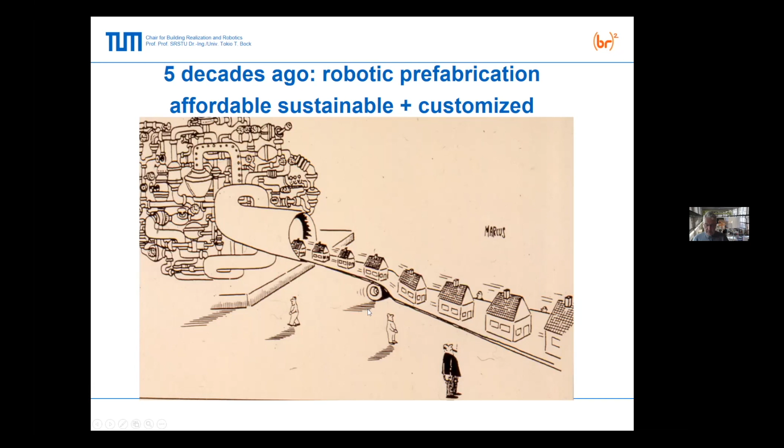That's already state of the art, and we are quite advanced, having factories that can produce 50,000 houses a year. It's not mass production anymore, it's customized production, but everything is automated. This is one of the most automated factories in Japan and maybe worldwide. They produce about 50,000 houses a year in steel.

I think it's quite interesting for what Mr. Woods will show, because they also want to do something in steel. And the assembly, I was also involved in the 80s - rapid on-site assembly in 4 hours. We assembled a house of 150 square meters, 2 stories, and kitchen, everything already equipped.

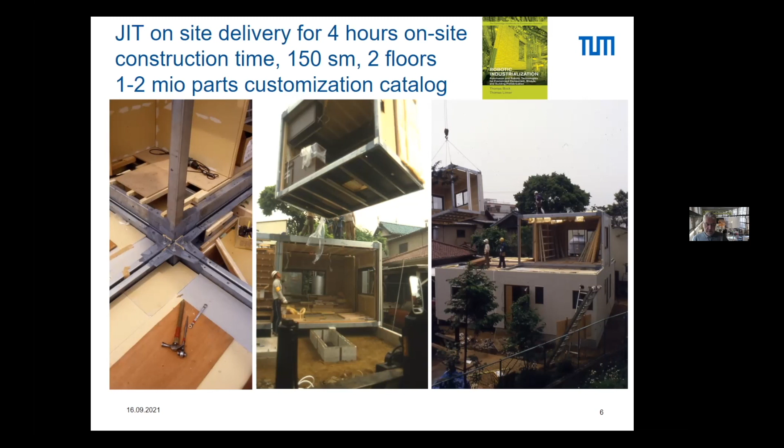So high prefabrication ratio. Then the next step was to close the loop to the construction site, since most of the things go wrong on site, as you can see at the Berlin airport and other disastrous sites. It doesn't help if you do the nice prefabrication module and then you screw it up on site.

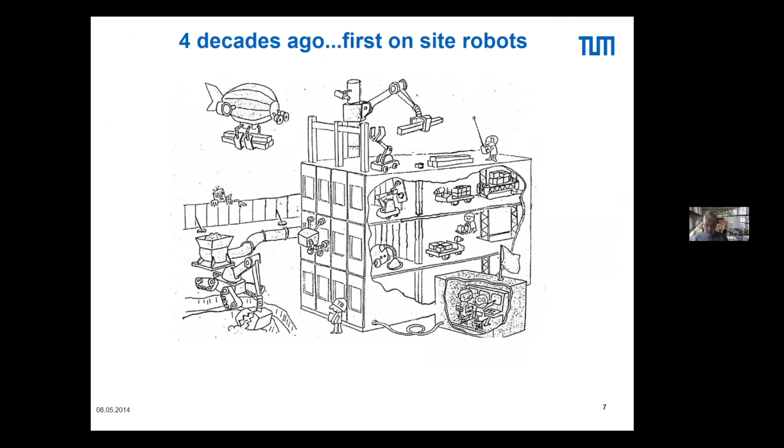These were the first 50 construction robots developed. I was part of them during my doctorate at the University of Tokyo. Now we've gathered about 300 robots in the Cambridge University Press series, 5 volumes. I'm going to show more details next week as well here.

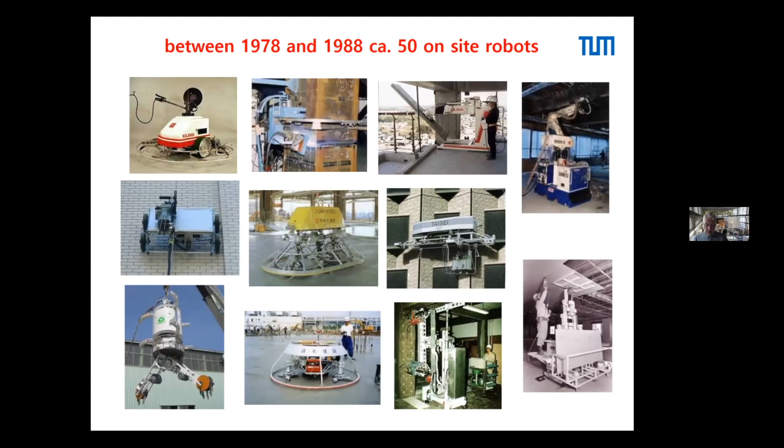And recently we did a lot of the refurbishment and renovation robots because that's a big challenge. And now robotics becomes more flexible and more adjustable.

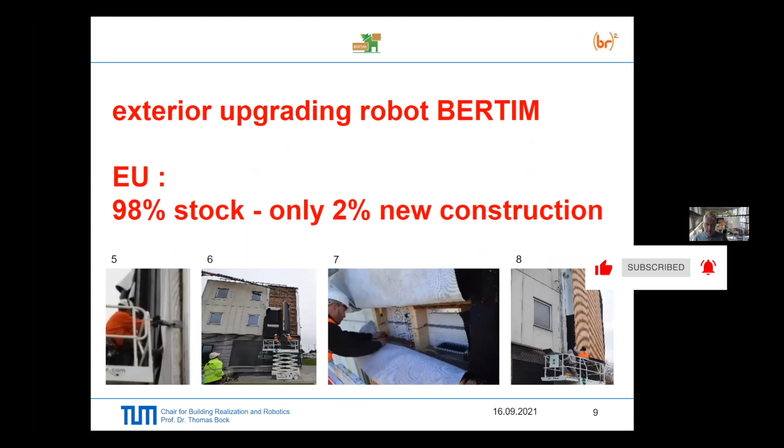Also, I will show next week a little bit more on it.

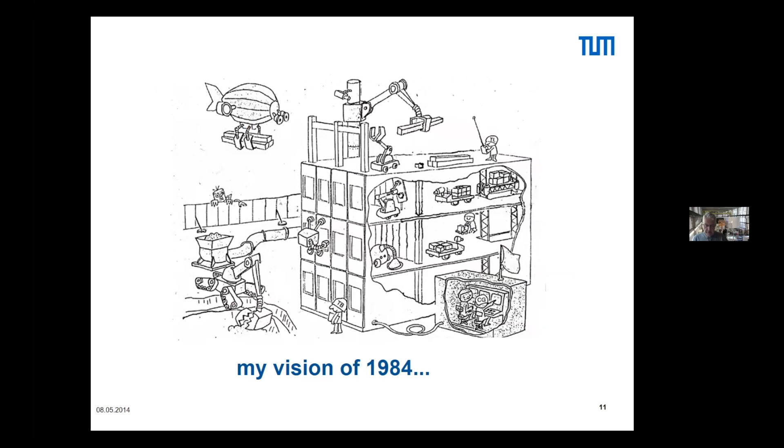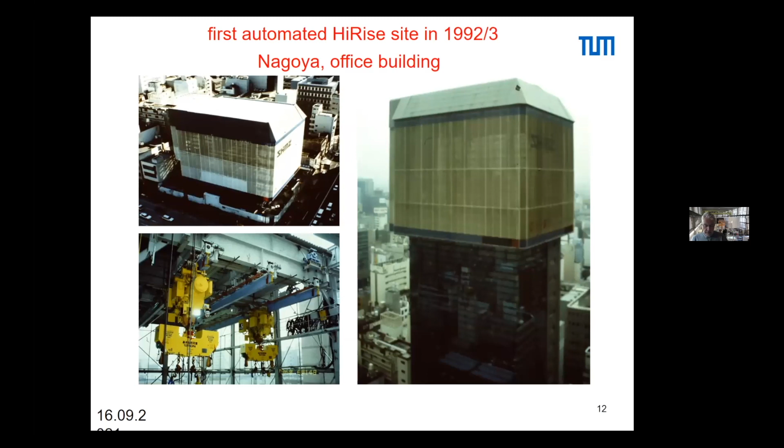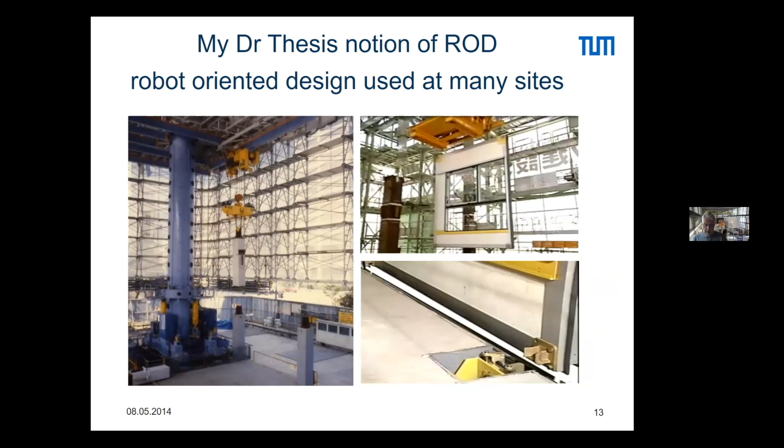I was also involved in this first automated construction site. It's like a vertical shipyard. We developed all the machinery, and I did the robot-oriented design, joining the high-rise faster than conventionally possible. This was applied to many construction sites by different companies.

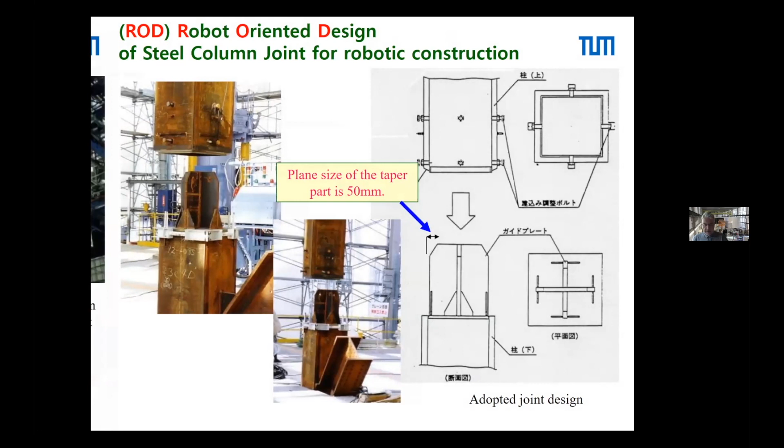This is part of my work for the company, so the robot could assemble the columns. We just talked about MEP with Alan - MEPs are already prefabricated and shipped all around Europe from Ireland. We did the same thing, assembling all the installations by robots on site. This was one of the recent sites I was involved in, in Osaka and Yokohama. But then came the virus, you know.

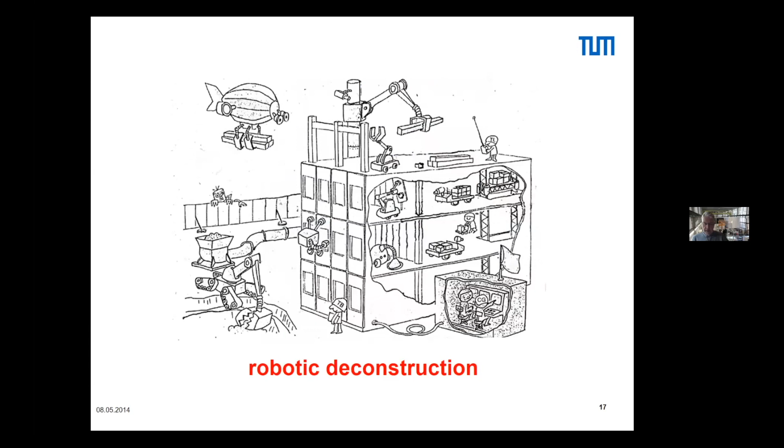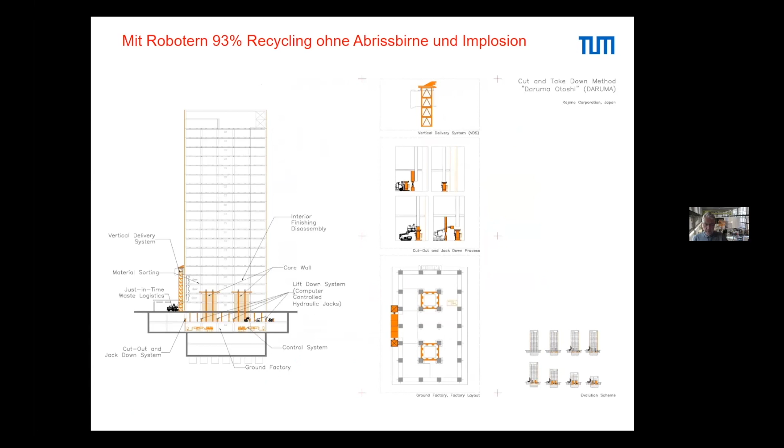The next thing is deconstruction. It's not dusty, there's no implosion, no wrecking ball. We did it systematically - we went into reverse of the robotic construction. We did the robotic deconstruction of this high rise, and many other high rises. You could recycle 93% of the whole high rise.

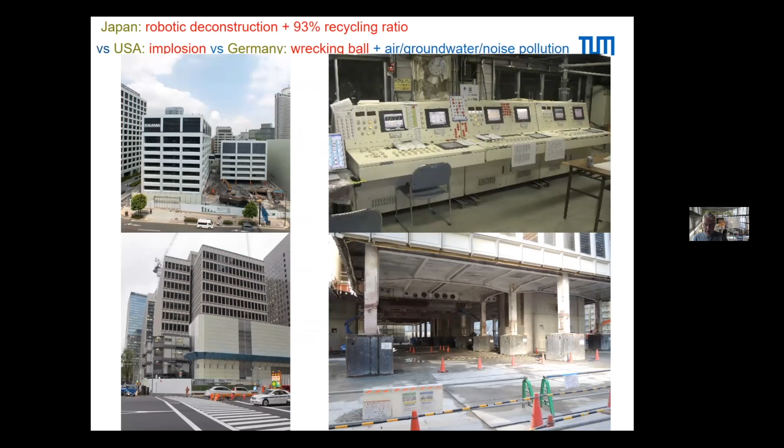Here are some examples. The lower one is across from the Imperial Palace in Tokyo, so they didn't want to disturb the royal family - very quiet, very clean deconstruction site. There's another one in Tokyo where it's very crowded - you can never use a wrecking ball, and you can never dream of using implosion. This would be forbidden in Tokyo.

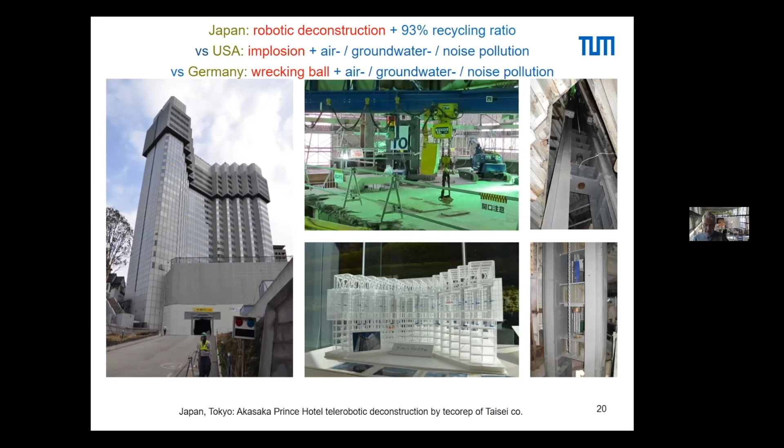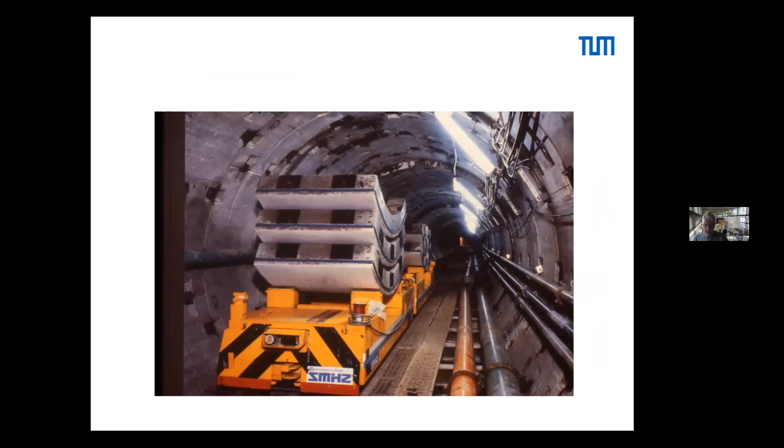Civil engineering infrastructure is also a big thing. I was involved in some new robots for huge underground storage construction, for huge underground caverns, automated tunneling under Tokyo Bay, robotic assembly of tunnel segments, and controlling several robots at the same time.

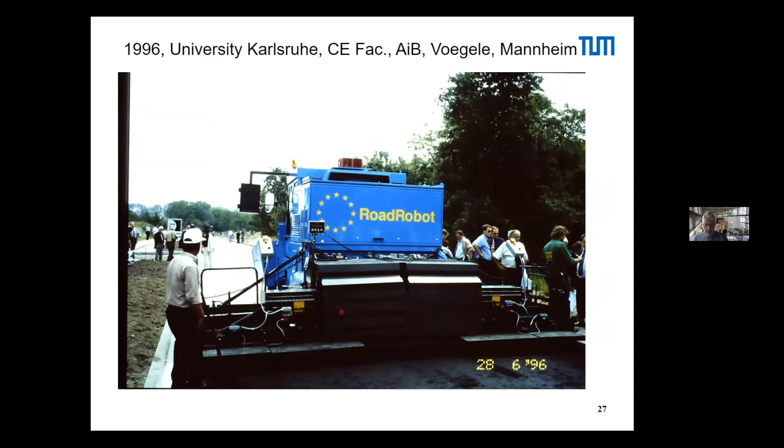I was 8 years with the civil engineers at the University of Karlsruhe. We developed the first European road robot, as you can see here. Now I'm in Munich with the architects, but actually you have to combine all of this.

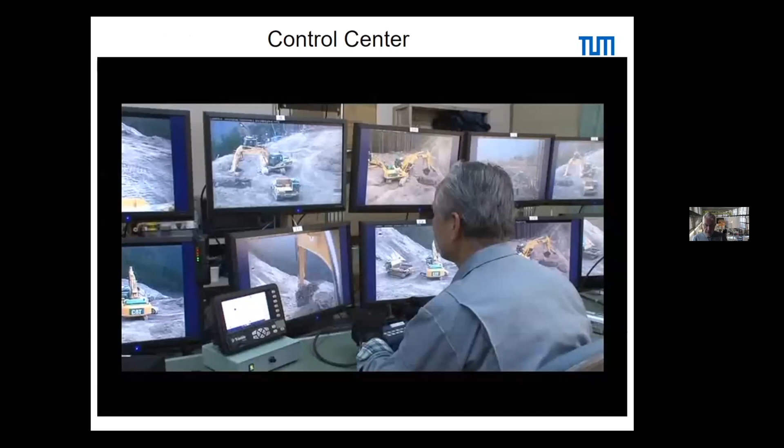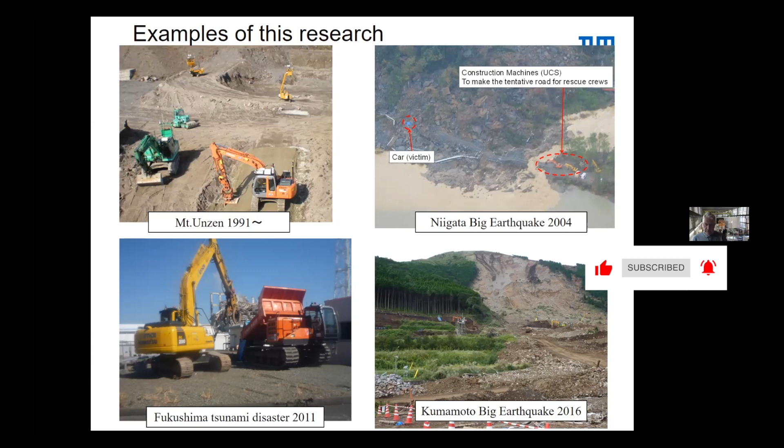Here's one of the most advanced autonomous robotic fleets, used after volcano eruptions, tsunamis, or landslides in Japan - different disasters. I was involved in these as well. So whenever it's dangerous, they send in the autonomous construction machinery next to the volcano or landslide. Well, that's maybe the vision of the future.

Okay, yeah, we're just under. Do you have many more slides, Thomas, just there?

No, that's over - maybe the next step is space construction. Anybody who wants to get into more detail can check the Cambridge University Press books - there are about 300 systems described. Anyhow, more next week.

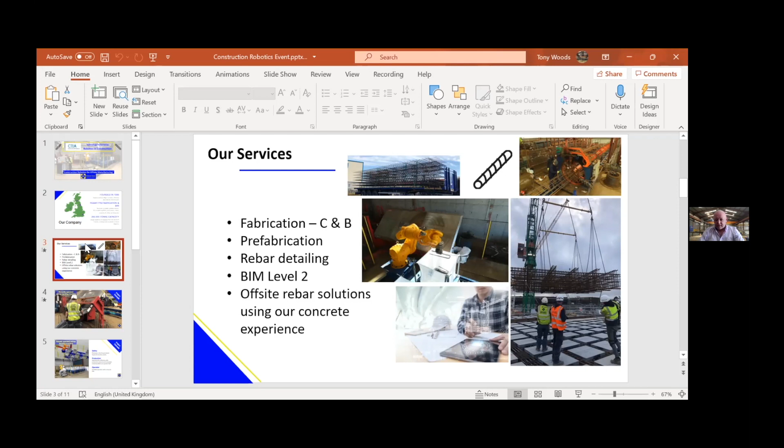So we have a situation here, which is our case study. What you see is a manual machine, a very manual operative process, and there were some hazards with the machine. There's a guard over the current head of the machine, as you can see there, to protect the operator. But we believed there was a better way and a better process.

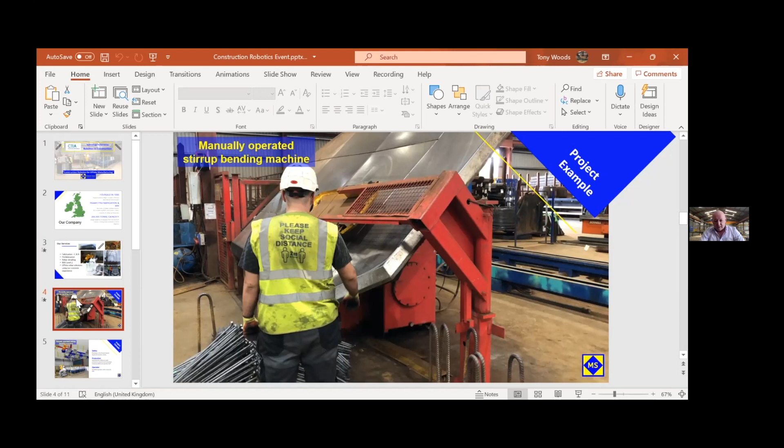So at attendance of a trade show back in 2017, we looked at safety with a particular supplier. We looked at production optimization, and we looked at the operator. And we looked at a robotic process. How can we bring a robotic process to our business? And how will it benefit us and the future of our productivity and make it a safer working environment?

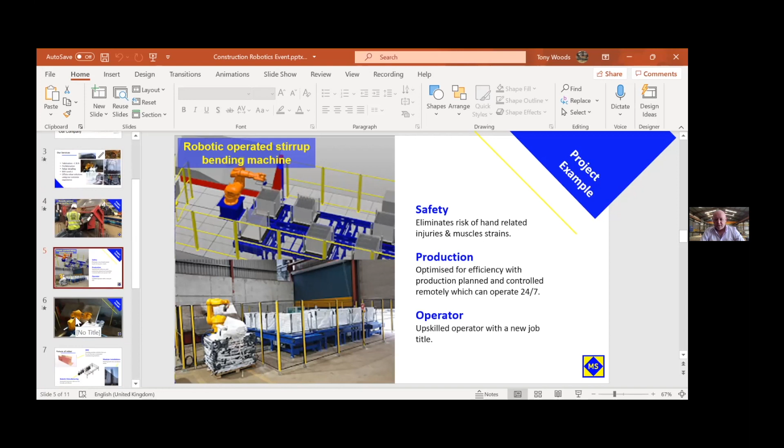The other consideration we had for this process was primarily the application of trying to bring new talent to our industry. Our industry is traditionally known as a very manual operative process, not the cleanest environment, as you're handling steel all the time. So by combining our expertise in what we do and the robotics engineering company whom we use to supply our first robot, we came up with this.

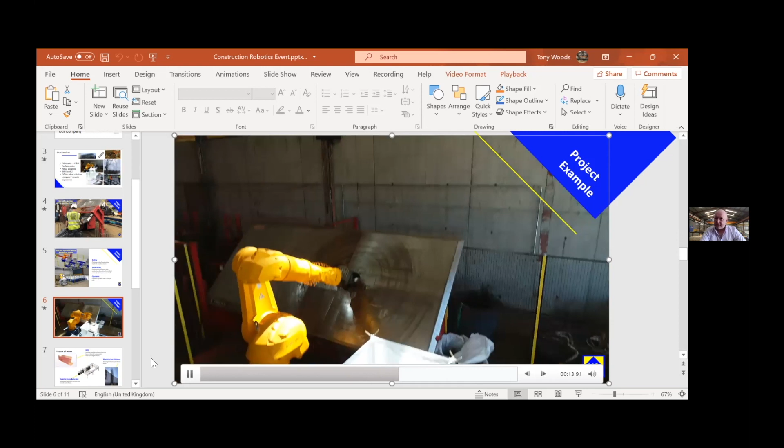And what you see here is now the robot assisting the machine. The machine is operating on an automatic cycle. The robot is doing all the manual handling and all the manual work that was previously done by an operator. And that now

is a benefit from our point of view in two ways. Firstly, from a health and safety point of view, it's enormously beneficial. Secondly, the precise accuracy of the way the material is being stacked in the sack material that you can see placing in it is far different to what a manual operator will do. So it's way easier when it gets to site to take the material back out again of the sacks. And we've had our customers complimenting us on that particular item.

So when we got this robot, we started to acknowledge and decide, well, what can we do next? Part of our process and configuration of reinforcement is in an offsite environment. Our next step is to take it to the BIM process, which we detail the modular sections. The modular sections are an enormous benefit on site, but before bringing them to site, we have got to come up with a robotic manufacturing process.

And what you're seeing here is a simulation of our idea. We haven't got there yet. We're very, very much in the infancy part of this process, but we are developing a machine to automatically weld reinforcement material with robots.

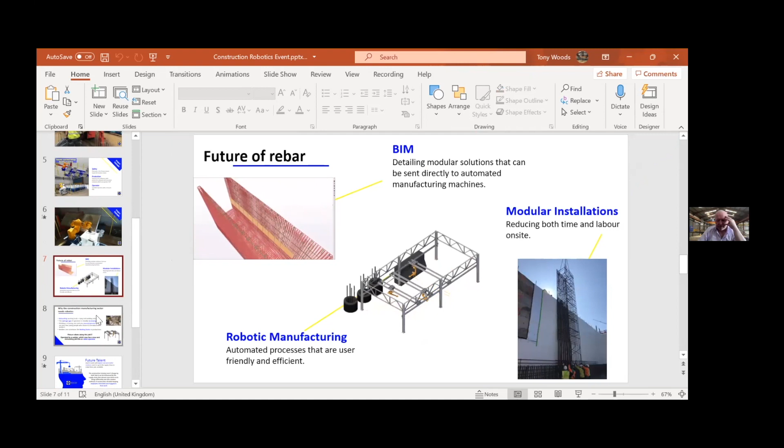What we're achieving from that, and why we believe the manufacturing sector needs robotics, is firstly, we're currently traditionally doing a lot of exhausting work tasks, tying and welding of rebar. The average age of the operators is steadily increasing, and it's now around 44 for a manual operative in our industry. Welding is a very boring, hot and manual process. There are very few young people who are choosing this as

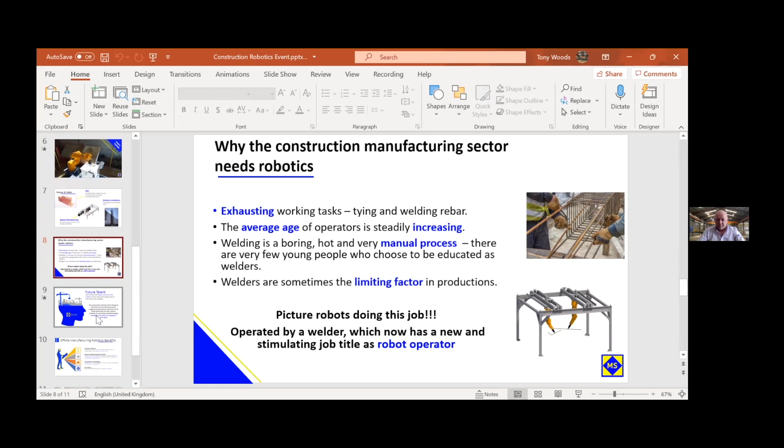their future careers. And what we are trying to do, I suppose, is initiate the robotic process and now employ robotic technicians. And that will be, I believe, the future generation of people that will become part of industry compared to the generation of people who are now currently working a very manual operative process.

The industry is not going to change. Future talent want to work with digital and automated solutions, and it's up to us as a supply chain to make these jobs available. The industry, as I said, will not change itself, but it can be influenced by the supply chain that attracts new talent to do things differently and more modern methods of construction, all the while keeping people engaged and bringing new talent to the business.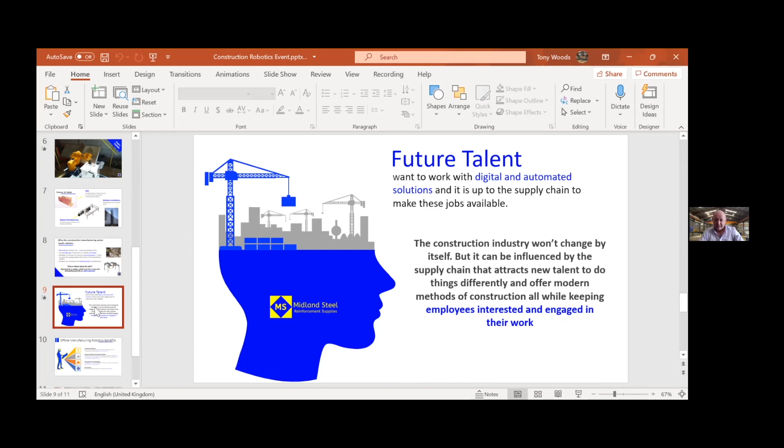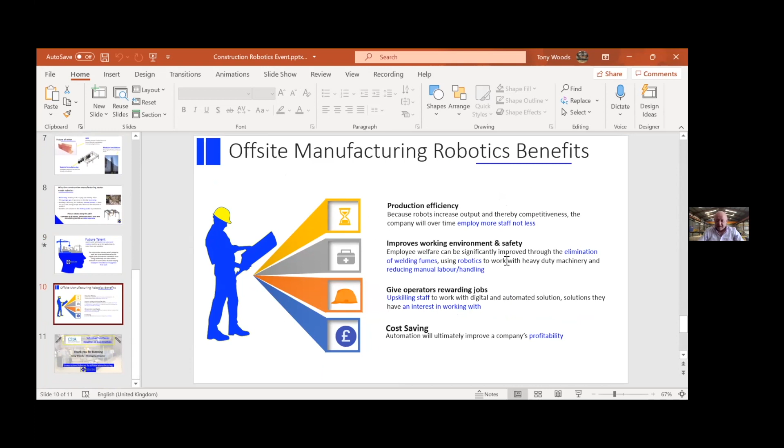What that will achieve: offsite manufacturing using robotics with production efficiency, improves the work environment in health and safety, which is our number one priority. It gives the operators rewarding jobs, and we can upskill our current operators to become those robotic technicians and employ more on the mechanical and electrical side in terms of maintenance. And obviously at the end, that will bring, with automation, a good cost saving to our business and a good commercial offering then to our customers.

So that's where we are as a business. We started with one. We're now looking at adding and developing the machine for phase two. And we believe in 10 years' time that without robotics, our industry will certainly be in an enormously bad way unless we can automate and digitalize our full process. The digitalization is as important as the robotics, as they're all linked. And that's where we see ourselves going as a company.

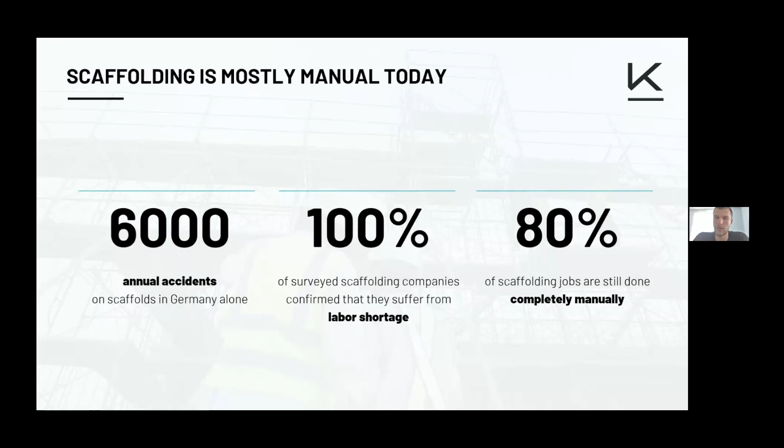As Professor Bock correctly mentioned, our first focus is scaffolding assembly. Scaffolding is one of those areas which struggles today from problems of safety, labor shortage, and inefficiency. A lot of scaffolding projects are still done completely manually, up to 80% of projects actually, with just a human chain of 10 or 11 people standing above each other. This is, of course, not the most efficient way of doing this. But unfortunately, because all existing solutions are so hard to operate and take too much time and overhead to install, people keep doing this completely manually.

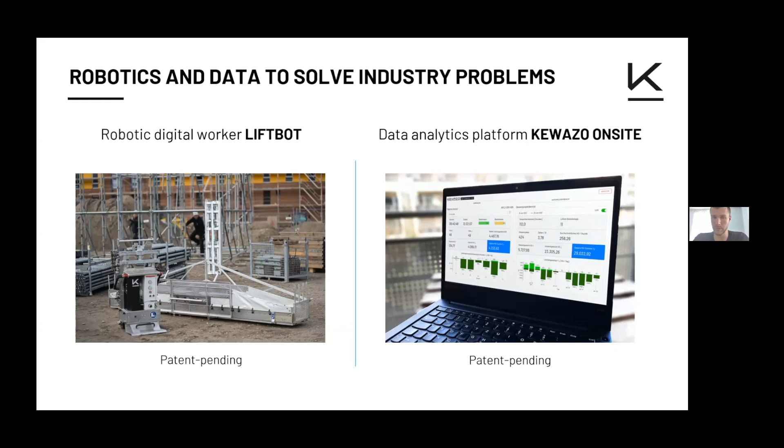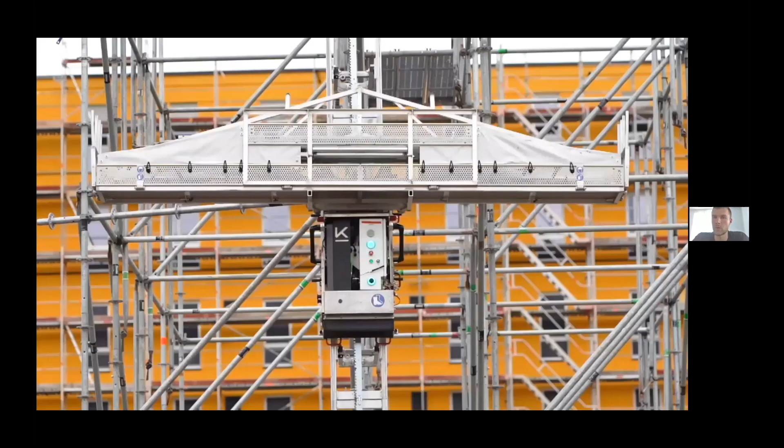As a solution at KEWAZO, we provide hardware and software solutions to address these problems. On the hardware level, it's a robotic material hoist, LIFTBOT, which can be quickly deployed with just standard tools. It's completely wireless, battery powered, and can be installed in 20 minutes. It requires almost no space on site, and is controlled also completely wirelessly, with remote controllers that help you operate in automated mode.

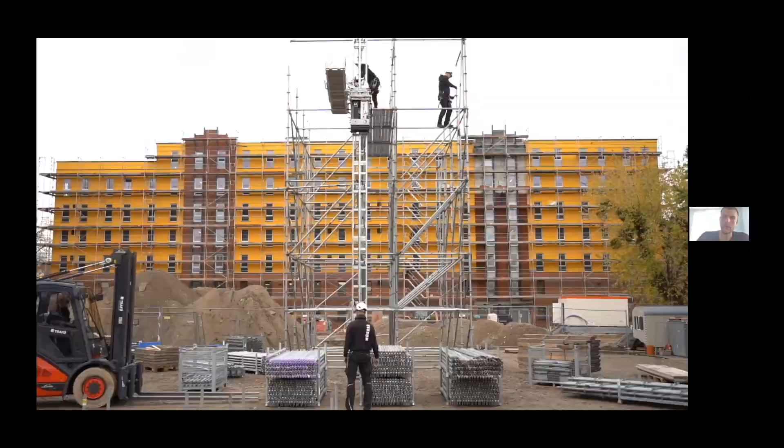Because of this, instead of having 10 or 11 people, jobs can be done with just 3 or 4, saving up to 44% of man hours, or around €1,000 per day. Other than that, it's also a direct solution to the problem of labor shortage, because you don't need to find 10 or 11 people for the project anymore. And it also improves safety because people get tired less and have fewer accidents.

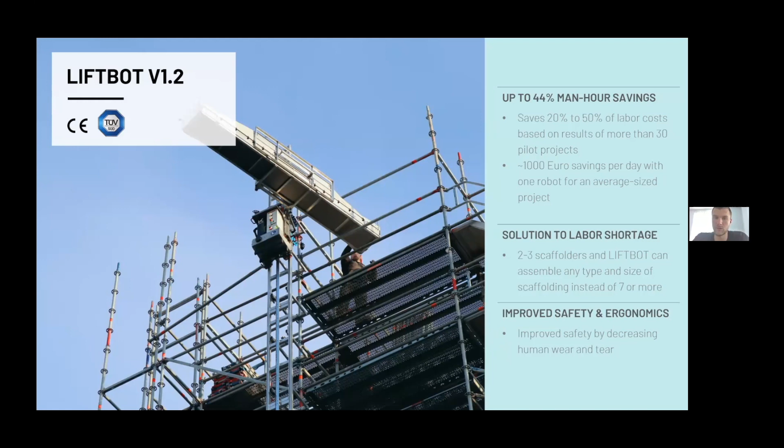Simultaneously, by having robots running outside, we gather operational data and improve transparency of processes on site. We gather information such as how much material is being transported, to which height, and when this happens, and we deliver it back to our clients in the form of a cloud platform, where they can see a storyboard of their previous projects.

Later on, we've also planned to analyze this data with the help of machine learning, so we can derive patterns from their previous jobs. As the next step, we also plan to introduce computer vision, so we can scan projects and single parts, giving our customers more transparency on what's happening on their sites.

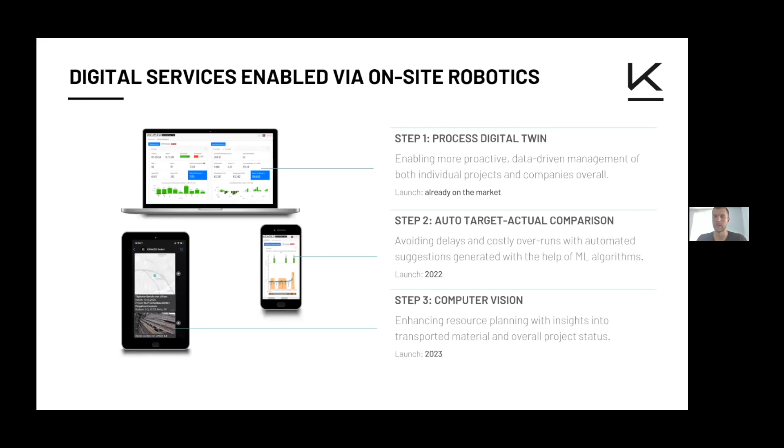So our strategy in general is to bring robots on site and deliver our clients savings on man hours, improve safety, and address the problem of labor shortage. By having people heavily interacting with robots, we generate additional digital services which they don't have today and may not understand today, but we will deliver to them because they already have robots. So it's digital services enabled via on-site robotics.

From the technological features, we have autonomous navigation and control. The solution is completely wireless, and we also provide data analytics services. Other than that, we have after-sales support in terms of remote maintenance and predictive maintenance for our clients.

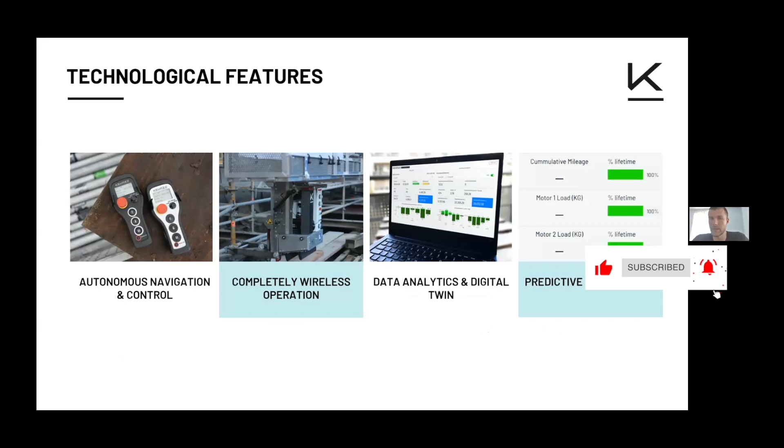The solution is mainly deployed in 3 main areas: construction, industry such as oil and gas, refineries, and maritime. Among our first customers are companies such as Bilfinger, one of the leading industrial service providers in Europe.

What's important for us is that scaffolders, the people who are on site, actually like our solution and want to work with it. The first reaction is, of course, people are really reluctant and critical, but just 1 or 2 days after they work with LIFTBOT, they're pretty happy.

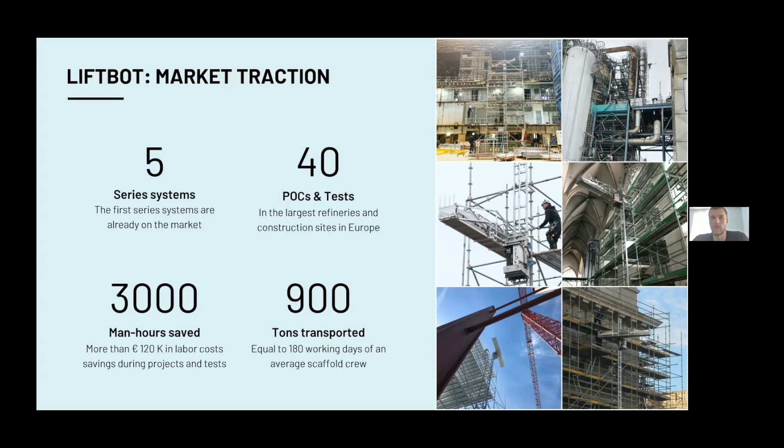Where we stand today: last year we certified LIFTBOT, and this year we already brought the first batch to market, 5 systems. We have systems running on different sites already since January this year. And here I'd like to show you an example of how this works in practice.

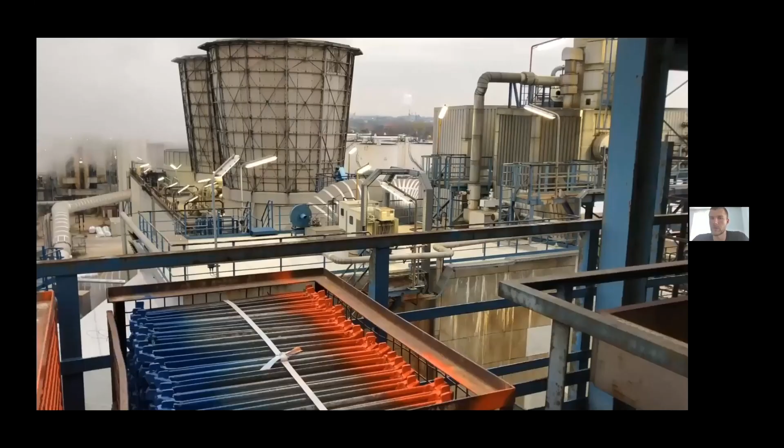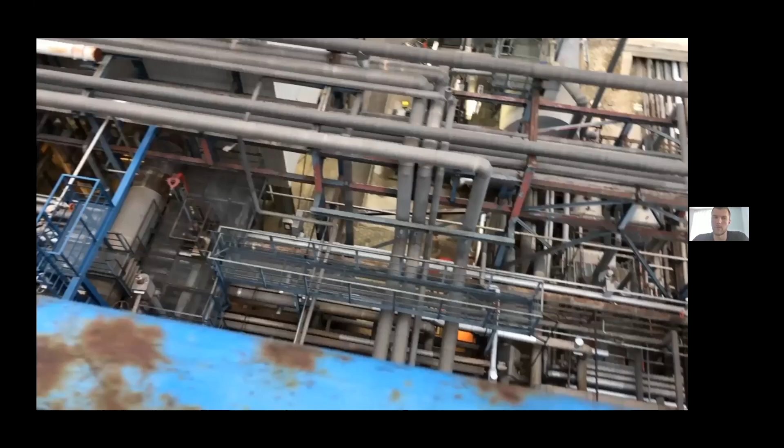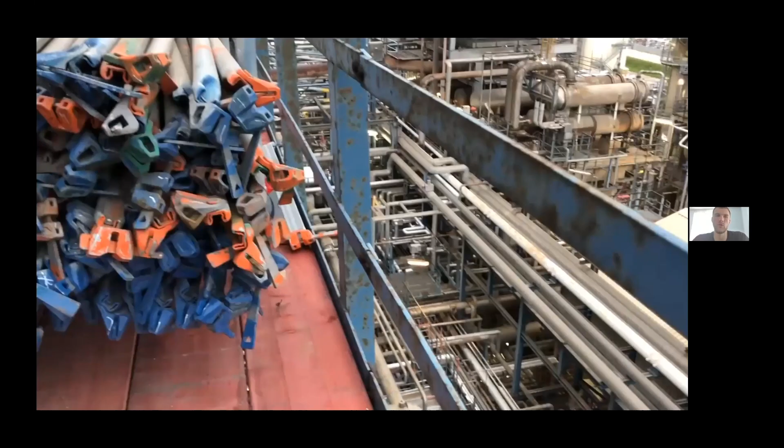Here you see a project from 2019, about 2 years ago, showing a typical refinery setup. This is not somewhere you'd be every day, probably not unless you went there with purpose. There's a lot of pipes, and because there's not much space available, usually scaffolders form human chains of 10 to 11 people and assemble it manually. But in our case, because LIFTBOT is completely wireless and doesn't require much space, we can install it even in complex situations.

What happened here: we are on a 30 meter high platform, and we need to build the last 30 meters of a 60-meter high tower. Normally you would have 4 people assembling this scaffolding in 4 days completely manually. But because LIFTBOT is easy to carry by hand, completely wireless, and doesn't require much space on site, it could be deployed here, and 3 people assembled the scaffolding in 3 days.

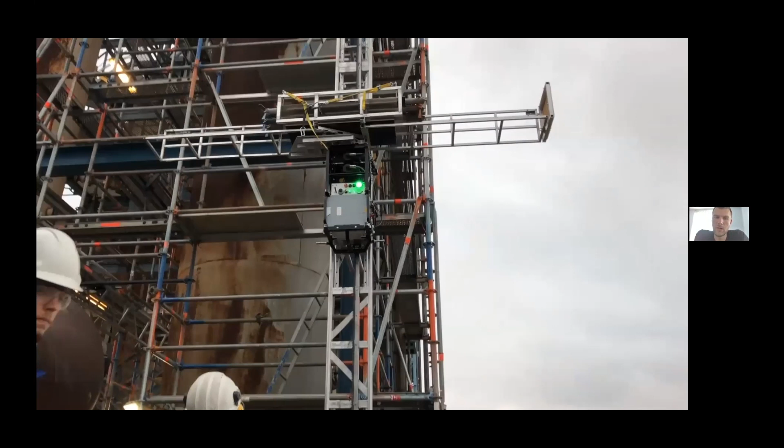So you can see here how it operates. Once material is loaded, the scaffolder just presses a button, and the system automatically drives to the required height with a speed of 42 meters per minute.

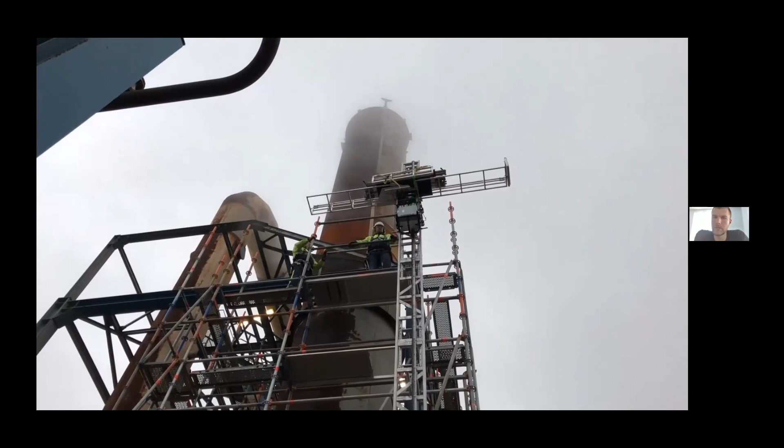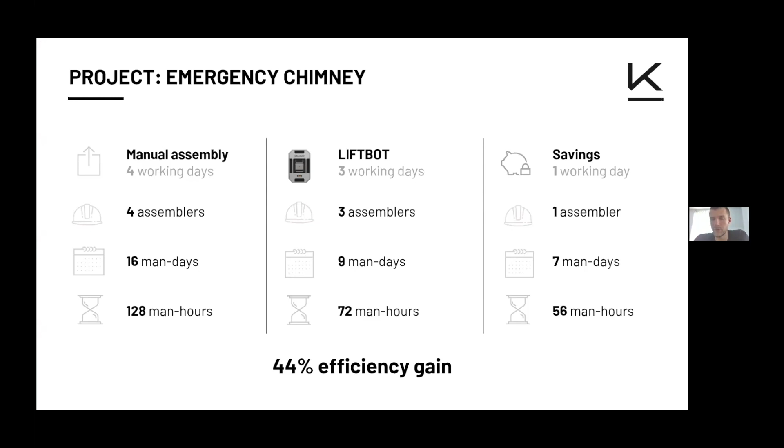What you see here is a pre-series version, version 1.0, which we had 2 years ago. But even here, we could already see that we can deliver high efficiency gains, and this is why we went further and delivered a certified product, which was certified last year.

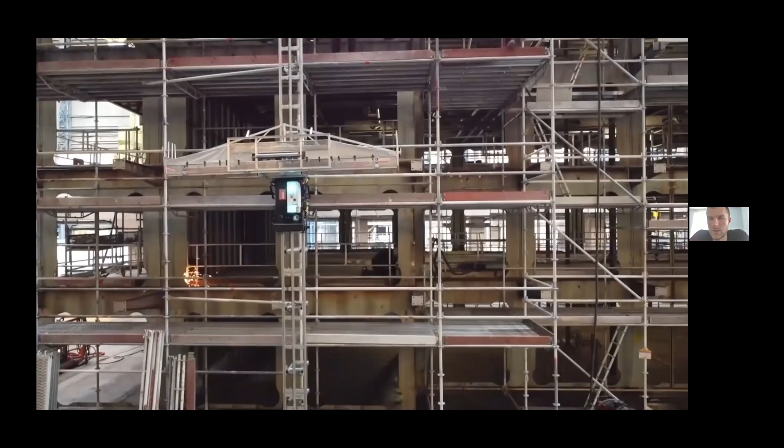Here you can see Meyerwerft, one of the largest shipbuilding yards in Germany, where you already see the next version of LIFTBOT, which is certified and already produced in a small series at our client, Bock and Deconstruction. They have 100 scaffolders every day, all year round, and a framework contract with Meyerwerft for the next 3 years, so they know they will have those 100 scaffolders and a lot of scaffolding projects for that period.

Our client, Bock and Deconstruction, also sees a lot of advantages in the data analytics solutions, as they're able to track projects, how they develop, and what's happening on site. So for them, it's a big advantage.

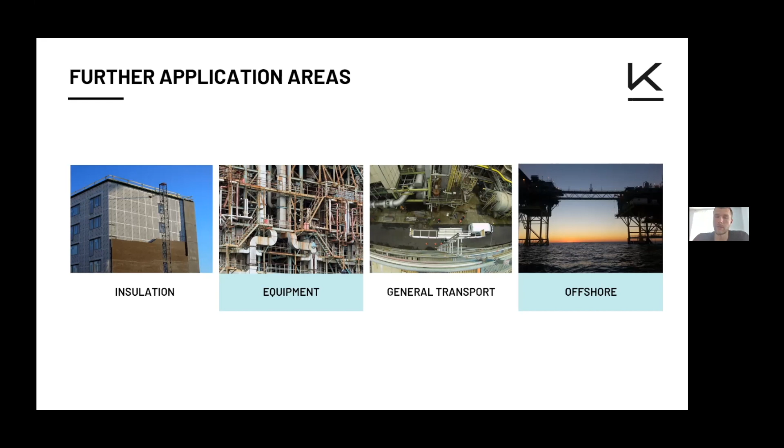Generally, LIFTBOT for scaffolding is just our first application area. We also plan to deploy it for insulation, equipment transport, and general material transport at construction sites and refineries. This is something that will be tackled as the next step.

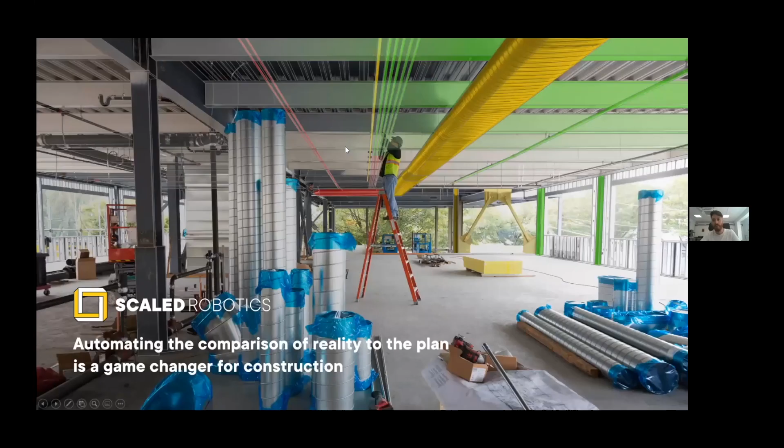So my name is Stuart. I'm the CEO and co-founder of Scaled Robotics. We are a Barcelona-based company that is automating the comparison of reality to the plan. We believe this is a game changer for construction. We think that by connecting the physical world, physical workflows with digital workflows, we have the opportunity to bridge that gap and supply better information to make better decisions to de-risk project delivery. We can take billions or trillions of dollars of assets and build them faster, better, more efficiently, reducing waste and reducing uncertainty on project delivery.

I think the best place to understand what we're doing and why we're doing it is if we go to Oslo and talk about a project we did there. This was quite a while ago now, but this was the depths of winter, absolutely miserable, at least -10. They were trying to build a 30,000 square meter development right down by the waterfront, with plus or minus 10 millimeters tolerance for structural steel and concrete, which to me sounds incredibly ambitious, but this is what the project needed.

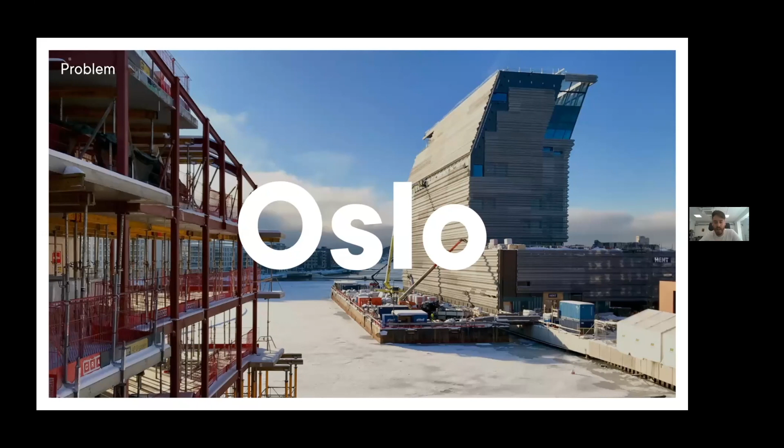Now the problem is that on this site, a structural wall was brought to the attention of site management, and it was not 10 millimeters out of place, it was actually 10 centimeters out of place. If this had been left undiscovered, it would have cost thousands of euros in extra costs. It would have cost the valuable time of at least 8 site managers running around like headless chickens trying to work out what was going on. And it would have cost at least 1 week of schedule delays on this project. The crazy thing about construction is that these kinds of issues are basically the cost of doing business. This is what we consider normal in construction, and I think this is what we're all fighting against.

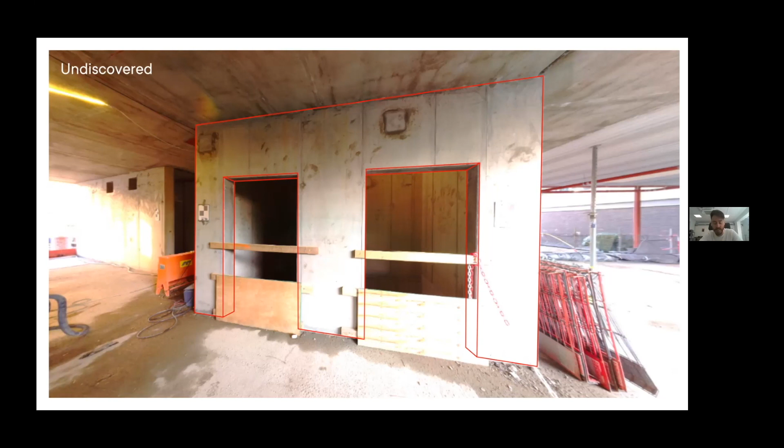But what was not normal about this particular project, and why it has a special place in my heart, is that this issue was automatically flagged up to site management by our AI-powered software platform, so that this issue could get fixed at no extra cost while the subcontractor was still on site.

Better information to make better decisions to be able to de-risk this project. Now, why did this even happen in the first place?

In our minds, what it comes down to is the fact that whilst we're designing digitally, we're still constructing manually. We put a huge amount of time and energy into the design phase, into BIM, a huge amount of investment in BIM. And yet, when you get to the field, there is a person there with a tape measure and a bit of string, basically putting things wherever they feel like that day. Someone described to me that modern construction we have at the moment is everyone building their hangover into your building eventually. I think this is a little bit unfair because I don't think people come to work wanting to do a bad job.

But construction is incredibly complex. We're talking about the installation of hundreds of thousands of elements in time and space by probably hundreds of different stakeholders in the elements. I mean, you saw minus 10 in Oslo. It is incredibly difficult to manage this project and to deliver to the quality that we know we need to be achieving within the industry, to meet all of the targets we have in terms of environment, in terms of quality, in terms of the product that we're delivering to the end customer. So it strikes me that it's completely insane that there is no quick and easy way of comparing what you intended to build to what has actually been built in reality.

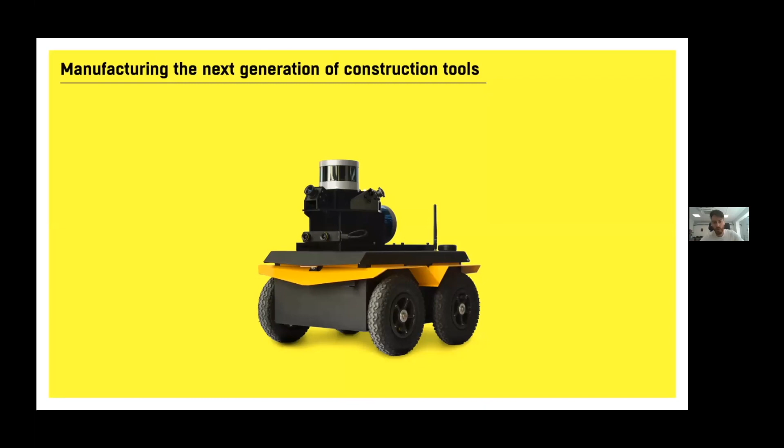But this is just one of the tools at our disposal to be able to capture data. We're also using handheld laser scanners and terrestrial laser scanners to capture data. We're a business after all, and we need to have a broad funnel of information that we're capturing. I'll get into that a little bit later, because either way, no matter whether that data is coming from a robot, a terrestrial scanner, or a handheld scanner, it's going to start its life as a point cloud.

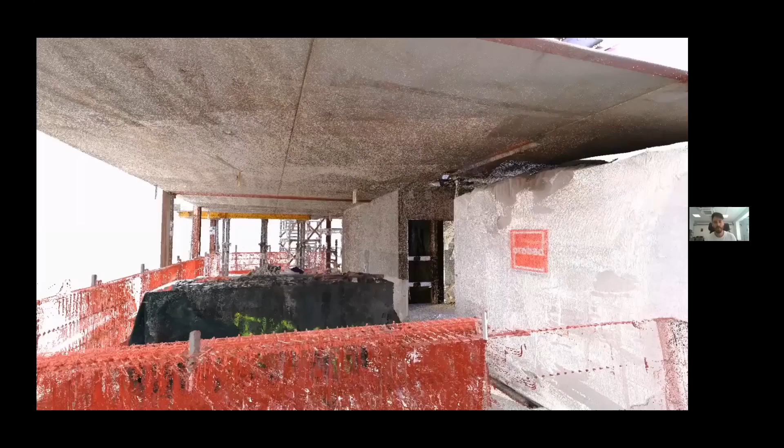I think many of you have probably seen a point cloud before, but it's a huge amount of raw data that you're getting from the construction site, whether from a terrestrial laser scanner or a Boston Dynamics dog, doesn't matter. It's a huge amount of raw data full of clutter, noise, and chaos—very complex environments for a robot to operate in, but also to extract any useful information.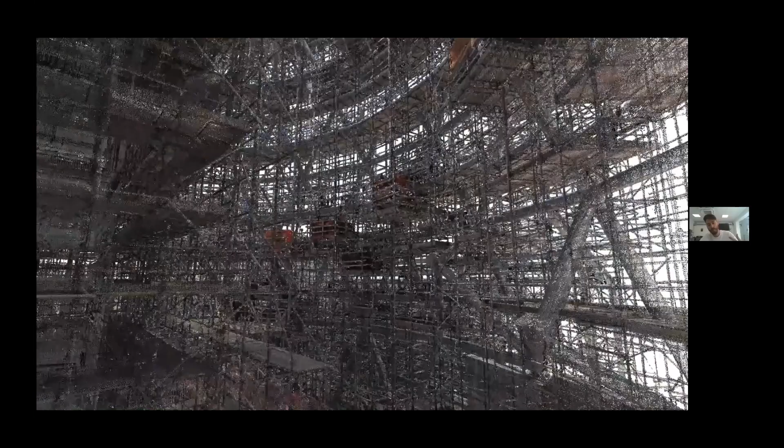So what we do is we upload all of that data into our software platform, and we start to process it using computer vision and machine learning algorithms. This is a project that we worked on in the UAE.

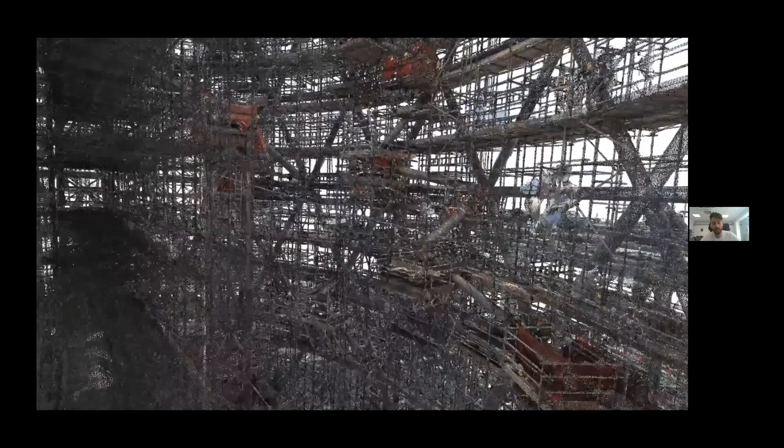It's an indoor roller coaster, because that's the kind of thing they build in the UAE. It's incredibly complex, and Artem would have loved this because it was full of scaffolding—probably more scaffolding than actual building. We have to start to make sense of that reality to be able to make decisions.

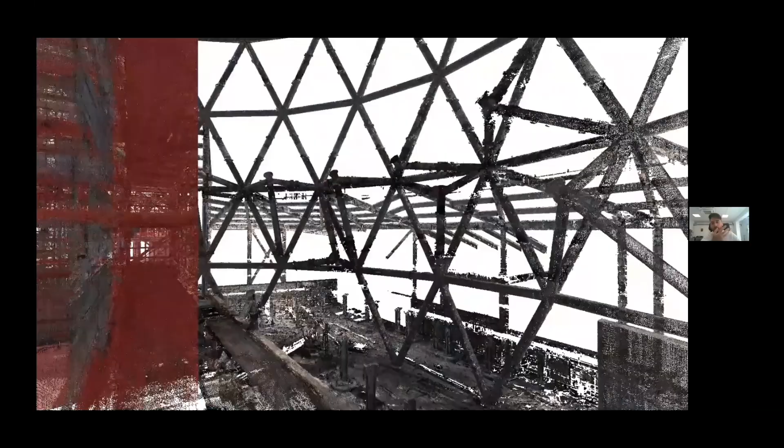So the first thing that the software is doing is coming in and filtering out everything that is not the building. Everything that turned red is not the building, and we filter that out so that we're left with good data. It's really as simple as good data in, good data out.

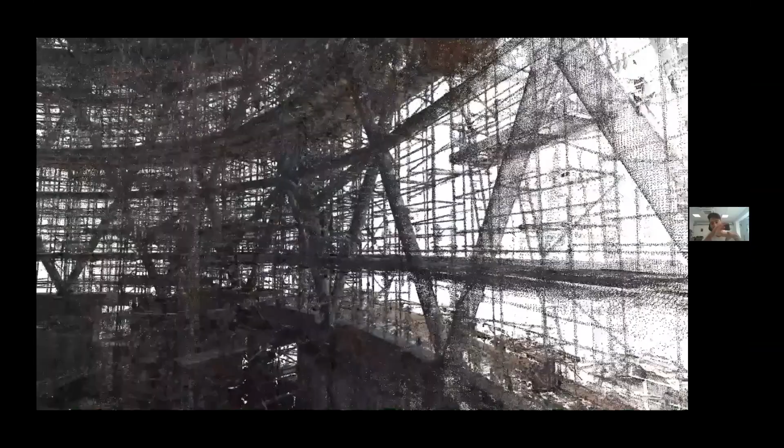Filter it, start to understand it, and then we try to take something incredibly complex and make it as simple and intuitive to understand as possible. So we align the BIM with the raw data, and we run an analysis on every single element, trying to make something complex as simple as possible. We color code everything within the model to give you a rough analysis.

Everything gray means no data—not enough information to make an assessment. It means we haven't seen it, or seen enough of it, to tell you anything useful. Everything green is within tolerance, so it's been built correctly—that's good, you should be happy with that. Everything red is missing and has not been installed—it doesn't mean we haven't seen it, it means it hasn't been installed. Everything orange is out of tolerance and has not been built correctly.

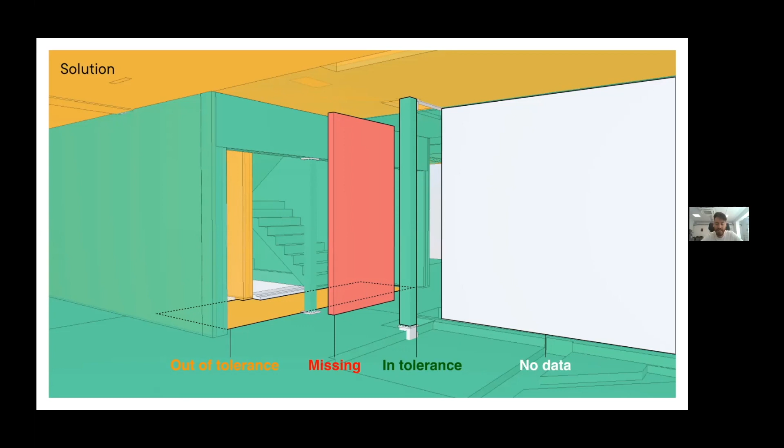Now, the problem with construction is that when you run through, everything is orange, everything is out of tolerance, and the entire building is technically wrong.

But there's a big difference between technically out of tolerance and wrong, and this is genuinely causing me a problem on my project, and I need to be able to take some kind of action. So what we do to cut through the sea of orange is to make this information searchable.

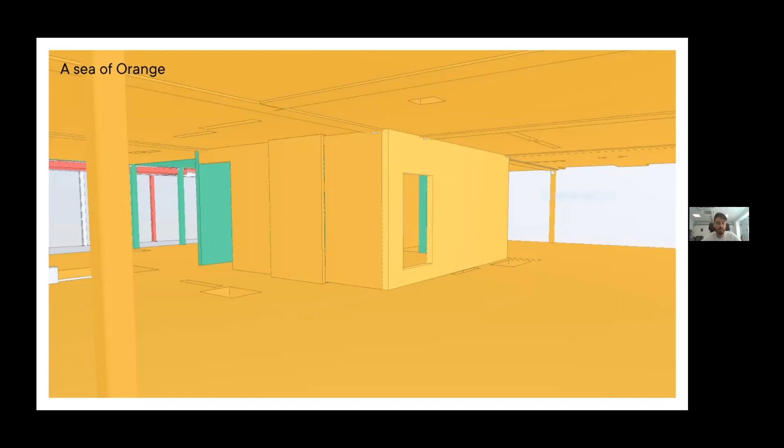So I can come in and search through all of those elements, and I find out that this element right in the middle, this wall, is actually 10 centimeters too close to that central core, which means the pipes and services are not going to fit from behind, which means you'd have to take expensive action to mitigate that problem. The fact that we picked this issue up as it happened means the cost of fixing it and keeping the project on critical path is going to be a lot cheaper. So you're immediately wiping out 10K of cost with just one issue.

Now, what does that look like on a real construction site? I'm going to share my screen and show you what that looks like on a real project. I'll assume you can see my screen—you should be looking at this hotel project in Oslo. Everything's hosted in a web viewer, so we take all that information and package it up and give it to you in a format that anyone, no matter where you are, from Japan to Munich to Dublin to Barcelona, has access to the same high quality information.

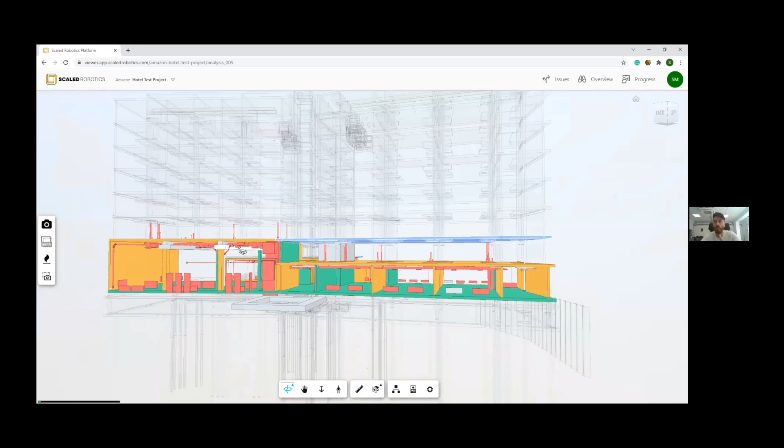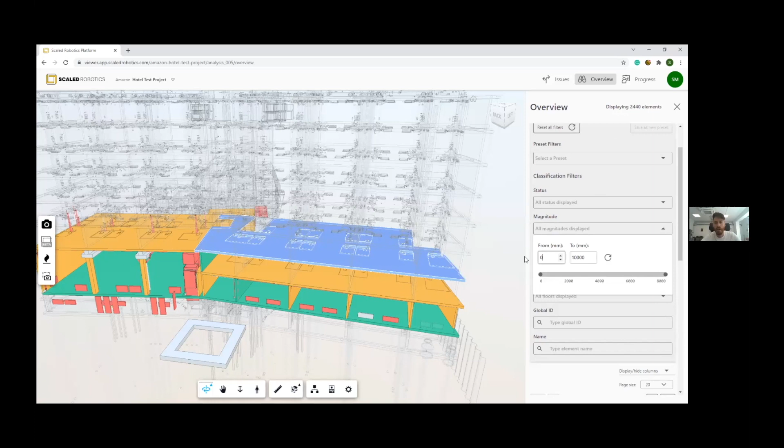And I can see all that color coding—there's actually 2,440 elements that have been automatically classified. This is too much for a human being to understand. So what I do is filter, manipulate, and search for that information. I can say, only show me elements above 25 millimeters of deviation. That reduces my search space from 2,440 to 15.

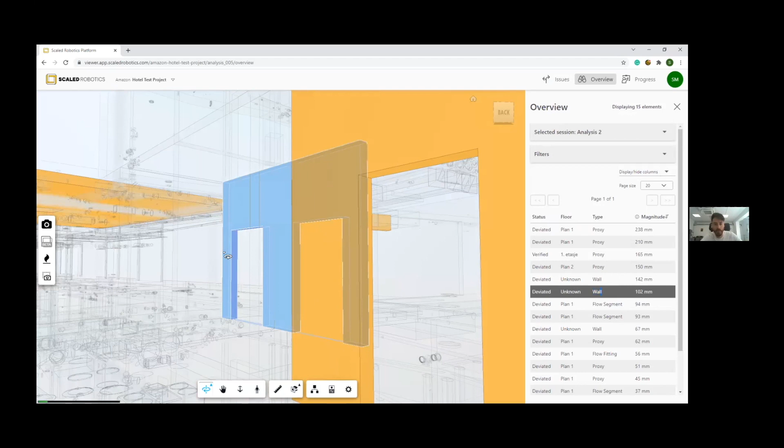Then I go into my list. Everything is automatically ranked by the magnitude of deviation. So I double click here. I have my wall—it's telling me it's 10 centimeters away from where it needs to be. I'm going to visualize that by checking out what it looks like on site.

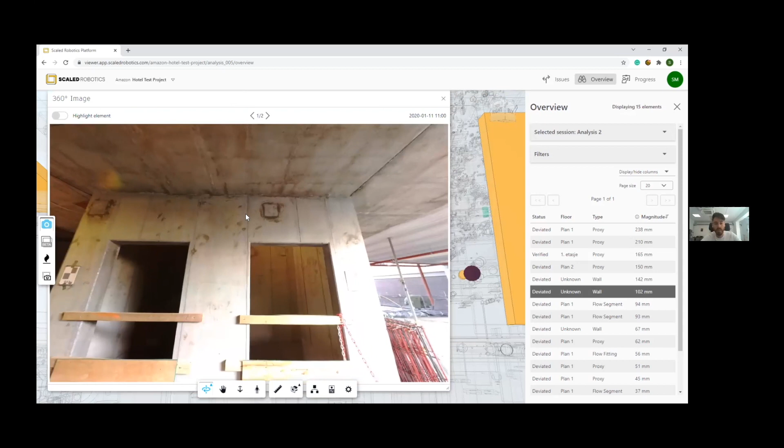This might be familiar to you from previous slides. Every single element is automatically tagged with every 360 image it appears in, so I don't have to go searching for information—it's already pre-organized. Then I can actually highlight it within the image to know exactly what I'm looking at. This means I'm using machine learning and spatial intelligence to make better decisions and organize that information. I can visualize the deviation using a heat map, so if red is negative material, I can see there's negative 100 millimeters of material underneath that doorway.

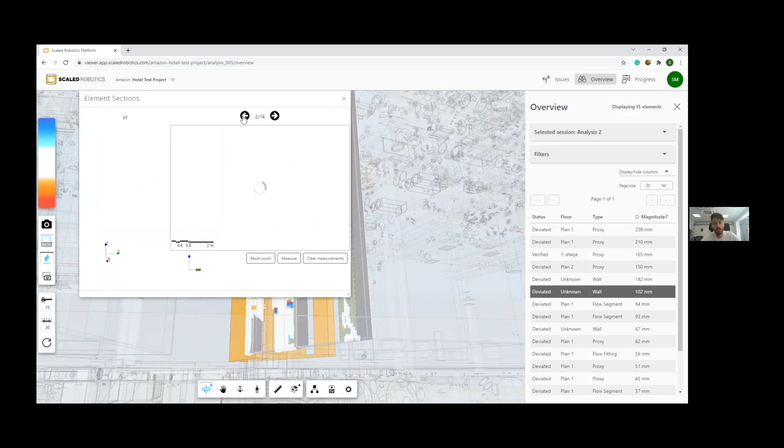We understand that for all the robots and machine learning tools out there, it's an industry that still enjoys 2D drawings. So we automatically generate 2D section drawings of every single element so you don't have to make it yourself. We're communicating in the language that people on site understand to deliver that information back. And I can just measure that out—black being the BIM, red is reality. There's about 9.5, 10 centimeters of missing material underneath that door.

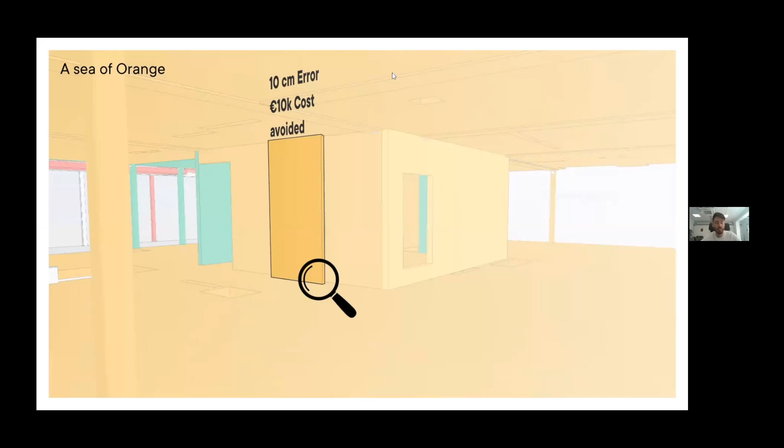So what I'm really trying to get across here is that we've gone from having no information about our project to having a really fine-grained understanding of what is actually happening, using the tools and technologies we need to understand large quantities of very complex construction data. The same technology you'd use to navigate a site is the same technology you need to start actually making decisions about what you want to do on construction sites.

Final point I'm trying to make: I think at this point, the way that we're looking at construction is like wandering around this desert and seeing patterns of rocks in the ground—little fragments of this big picture. We look around and all we can see are these fragments, all we can see is what we perceive ourselves, because we're only human after all, with finite experiences and a finite amount of things we can take in. But what machine learning is doing, what robotics is doing, is allowing us to capture information and look at it in a different way, giving us a different perspective on the projects that we're running.

So now, when we look at this same pattern of rocks on the ground, but we look at it from the air, we realize that it actually forms the pattern of this incredible bird in the middle of the desert. And it's the same with construction. When we look at it from a different point of view and a different perspective, we start to realize that there are patterns going on under the surface that we would never have been able to pick out as a human being. And we're using better information, better insight to make better decisions, to be able to de-risk projects and to be able to move towards the future of a fully automated construction site, closer to what we would call true automation, or building products in the same way we're building iPhones in factories.

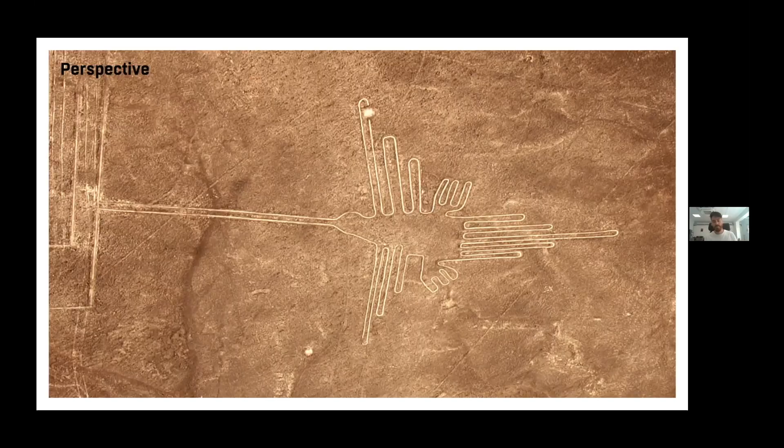Thank you very much. Thanks, Stuart. Interesting, thank you very much.

So control the process proactively. But first you need to do what he's doing. I think it's a high potential company as well.

Thanks, Stuart, for the nice presentation. Yeah, it's really interesting. We have a few projects like that in Ireland as well, where we had problems. The problem with a lot of these projects is they're so big, so large, so complicated, and they try to maybe look at things traditionally, whilst really they've got to - you can't eat an elephant, you've got to take each component and work your way through. So it seems to me that the people behind these large projects, who are responsible for delivering very large scale infrastructure projects, by way of an example, they need the best technology in position as a default position, not to be leaving it to the contractor to believe in. It needs to be driven from the client right through.